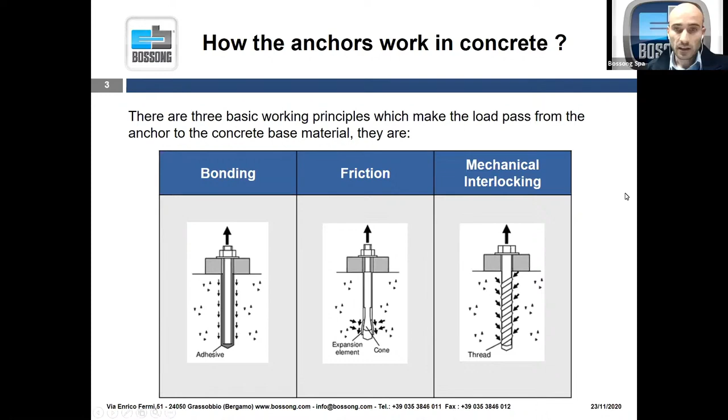So, how do anchors work in concrete? To understand how anchors work in this type of base material, you can see this slide. It's quite easy, and the main principles of working are bonding, friction, and mechanical interlocking. To give you a simple overview, you can find each type of mechanism correlated to the type of product that you can find in the market.

Bonding means that bond adhesion is created between the rod and the base material, so basically you have a chemical anchor with a threaded rod or a rebar. The friction mechanism is typically used by sleeve anchors or through bolt anchors: the expansion of the cone creates friction between the cone itself and the concrete surface. The other type of mechanism is mechanical interlocking: the particular geometry of the steel element guarantees an interlocking between the concrete and the thread.

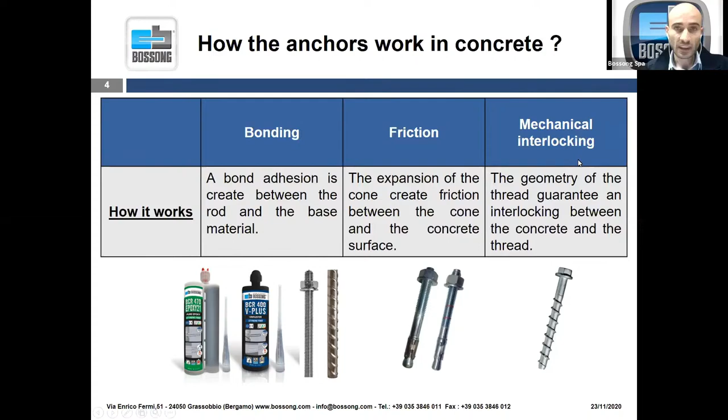The other really important step is the design principle of anchors in concrete. Within the world of fixing, two theories behind anchors in concrete are well known, depending on the type of installation. The first is the standard fixing theory according to the concrete capacity design, CCD. The other one is the reinforced concrete theory.

In the first one, the main application is the fixing of a steel element, like a metal plate, to a concrete substrate. In the second one, the reinforced concrete theory, the target is to connect a new reinforced concrete element to an existing reinforced concrete element. For this purpose, typically only bonded anchors are used.

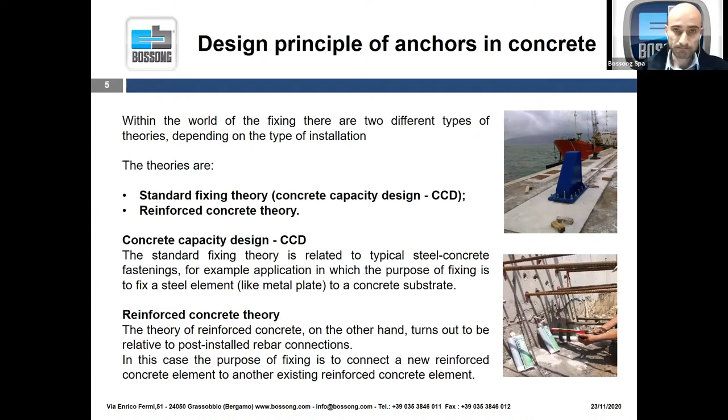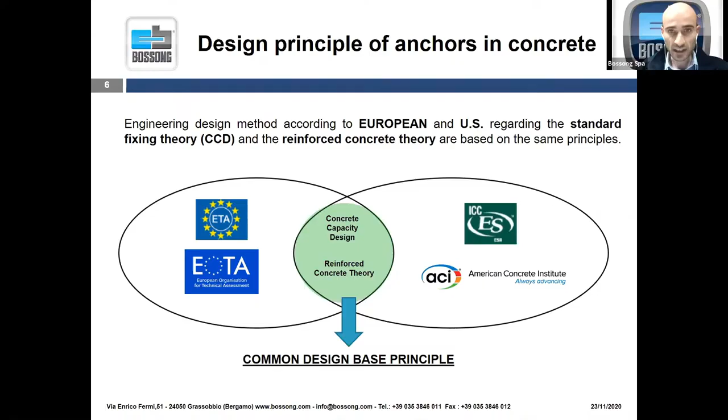The European and US systems today represent the maximum knowledge on the behavior of post-installed anchors in concrete. You can see in this slide the two different systems: the European system under EOTA and the US system under ACI. But it's really important to define at the beginning that both are based on common design principles, for the concrete capacity design and also for the reinforced concrete theory.

You can see an overview of the European design principles. In the concrete capacity design, the tensile capacity of the concrete is directly used in order to transfer the load inside the concrete. In the reinforced concrete theory, the anchor is designed as a lap splice. This picture comes from the European guideline and the European design document.

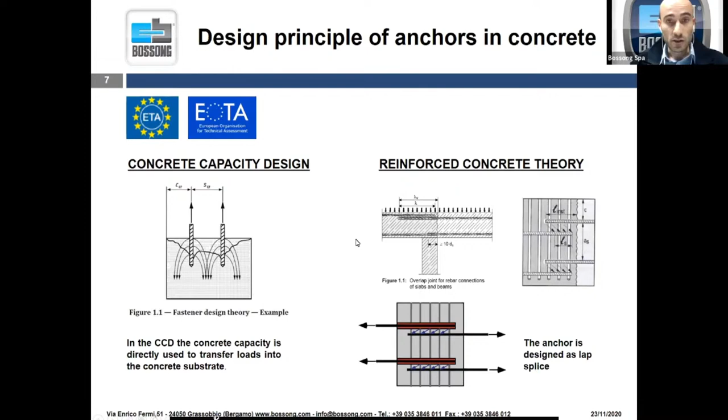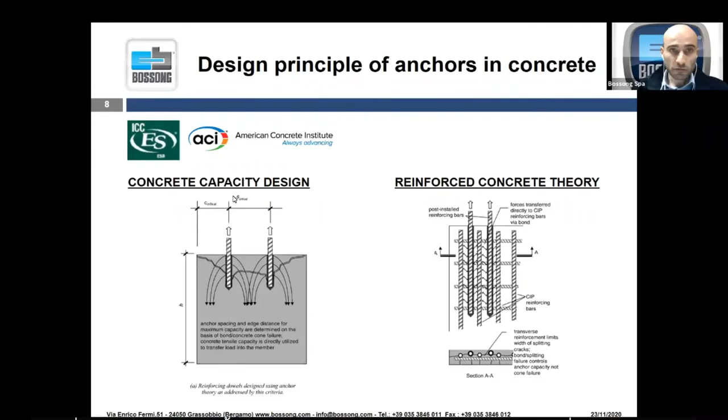As you can see, the same picture and the same principle are used for the US system. In the concrete capacity design, the tensile capacity of the concrete is directly used. You probably know the base principle of the concrete cone failure. And for the reinforced concrete theory, the post-installed rebars are designed as splice anchors.

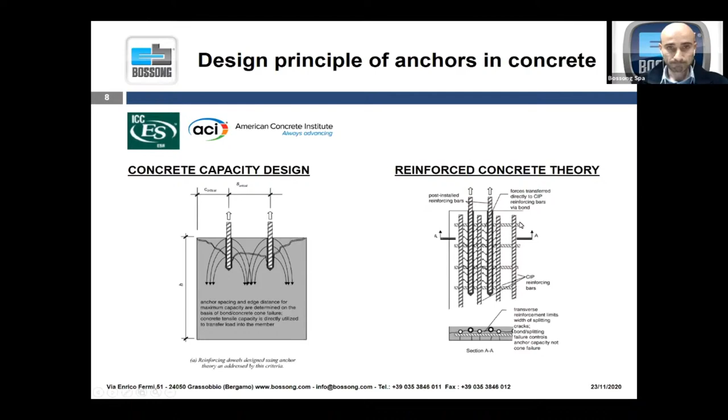Regarding qualification, in Europe the qualification of anchors in concrete is under the EOTA system. EOTA is the European Organisation for Technical Assessment. This organization, thanks also to the participation of industry in Europe, produced the EAD guidelines. EAD means European Assessment Document, and inside this guideline producers in Europe can find all the rules to follow in order to qualify an anchor, mechanical or bonded, in concrete.

There are a lot of EADs. You can find them on the EOTA website, but the really important EADs today are the following: 330499 regarding static and seismic qualification for bonded anchors; 330087 for static and fire qualification of post-installed rebar connections; 332402 for seismic qualification of post-installed rebar connections; and for mechanical anchors, 330232. We also have the EOTA Technical Report 049 regarding seismic qualification for mechanical anchors.

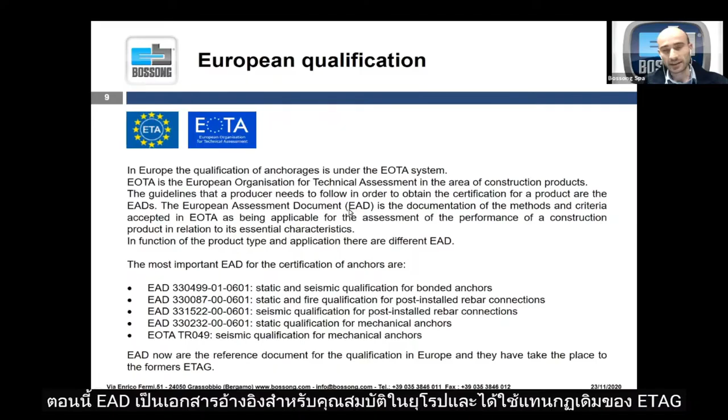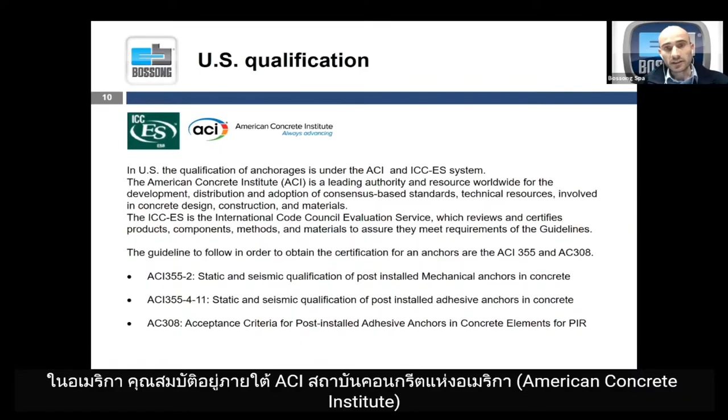In the US, the qualification is under the ACI, the American Concrete Institute. The ICC-ES is the International Code Council Evaluation Service, which reviews and certifies products, components, methods, and materials to assure they meet the requirements of the guideline.

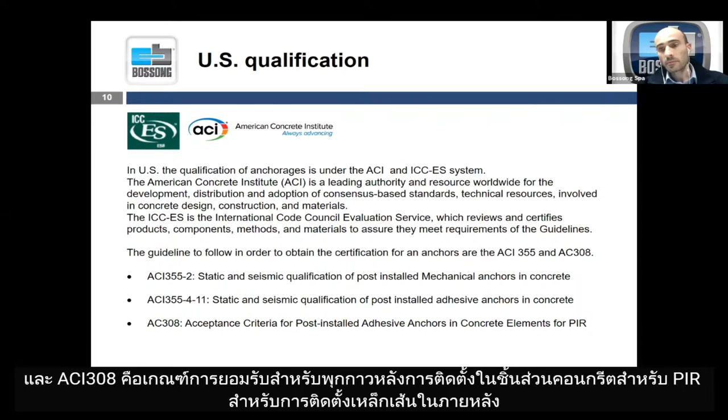The guidelines to follow in order to obtain certification for anchors in the US are ACI 355 and AC308. The first one, ACI 355.2, relates to static and seismic qualification of post-installed mechanical anchors in concrete. For bonded, adhesive anchors, the guideline is 355.4. And AC308 is the acceptance criteria for post-installed adhesive anchors in concrete elements for PIR, post-installed rebar connections.

I hope that this slide is useful for you. It's just a summary table of the main documents relating to the European and US systems. If you want to go in depth into these documents, you can find them on the website, and you can find the certification of the product, and also some documents and research regarding the design standard, which in Europe is the Eurocode 2-4 and also the European Technical Report 055, and in the US system the design standard is ACI 318.

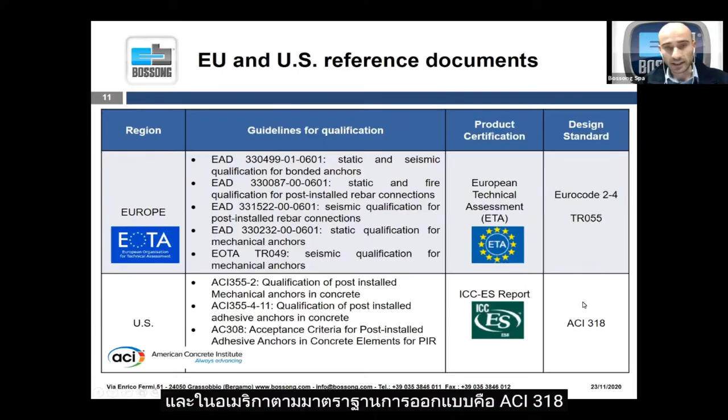About the certification in Europe, we have the ETA, the European Technical Assessment. In the US, the product certification is the ICC-ES evaluation report. Both documents include the technical performance relative to an anchor product. Inside you can find data about the producer, the product name, description of the product, the application, the intended use, the essential characteristics, the performance. So it is the document used by the designer and by the subcontractor in order to understand the level of performance of the product.

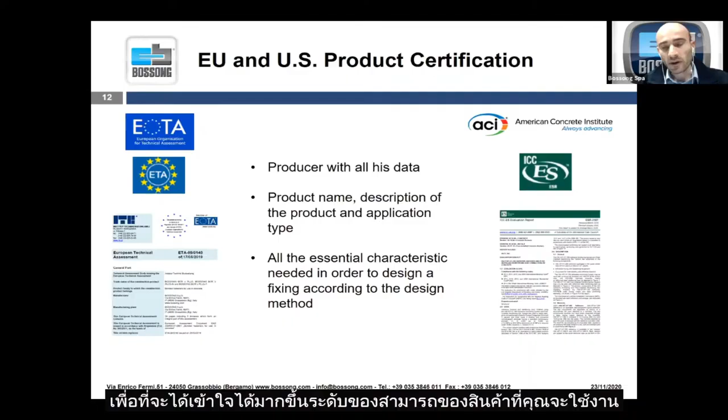An important topic regarding the European and US systems is seismic qualification. Today it is a very discussed and important topic, and on the web you can find a lot of research, dissertations, and opinions. Let me say some brief notes about it. In the USA system in 2001, the ACI 355 document included, just at the beginning, the seismic qualification for post-installed anchors in concrete, and then they reviewed this type of document in the following years. And today they have only one test protocol.

Instead, in Europe, seismic qualification was introduced only in 2013. The first document was the ETAG Annex E. Then the ETAG Annex E was renamed EOTA TR049. And now the EOTA TR049 will take place inside the specific EAD for bonded and mechanical anchors. Today in Europe, for seismic, we have two test protocols: test protocol C1, let me say less severe, mainly relative to non-structural applications, and the new protocol C2 that is more stringent and dedicated to structural connections.

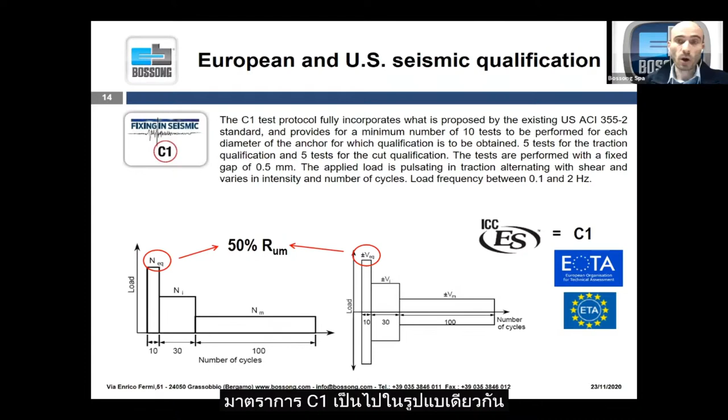But after a lot of study and a lot of research, in Europe we decided to introduce a more stringent protocol, C2. As you can see, instead of 10, you have at least 30 tests per diameter, and the tests are performed in cracks with a maximum width of 0.8 millimeters. So this protocol is really more demanding on the anchor, and the C2 protocol adds extra safety for extreme seismic events, and it's generally used for buildings of high importance.

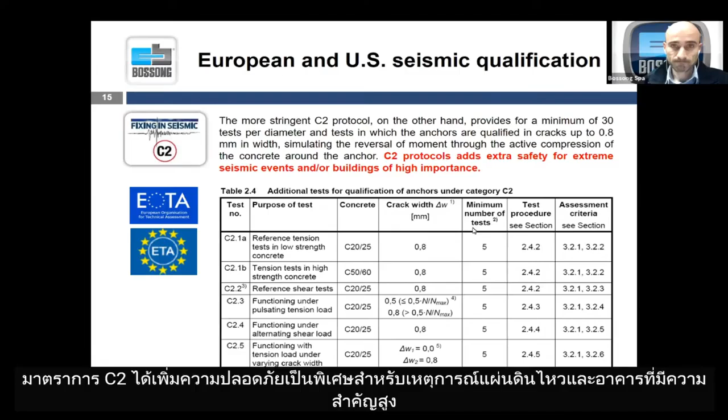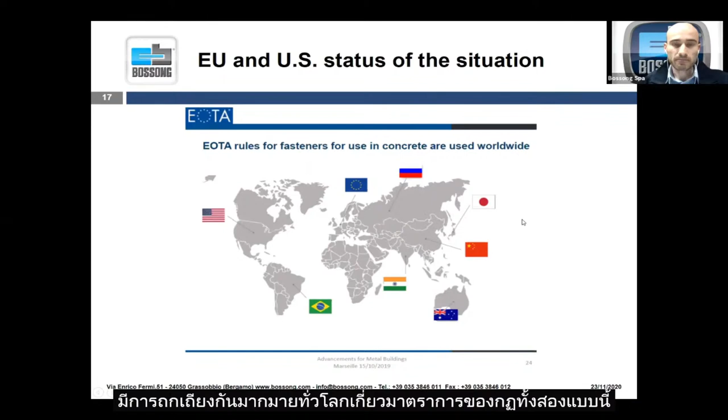So in conclusion, it is clear that both systems, in terms of testing and assessment, are based on the same principles. And so the European system and US system are really similar. Of course, there are some differences, but the two organizations are working to align the situation. The seismic design is quite the same; the difference is in the protocol. Protocol C1 is really the same, but protocol C2 in Europe is really different, more severe, and adds extra safety.

As proof of this similarity between the two certifications, in the last year the EOTA organization and also the ICC posted articles explaining the similarity between the two certifications. And as I told you before, the most important organizations expressed their will to collaborate in order to align all the technical specifications and to allow the free use of both certifications around the world.